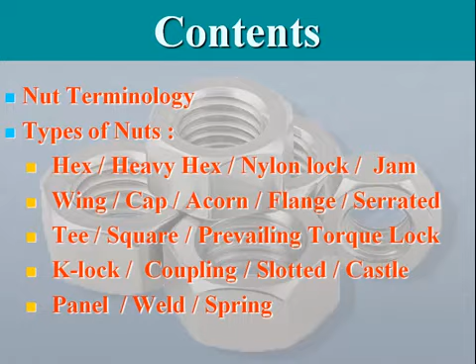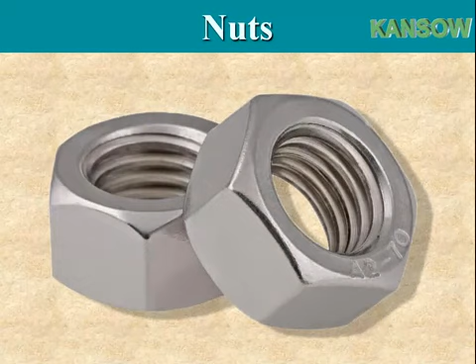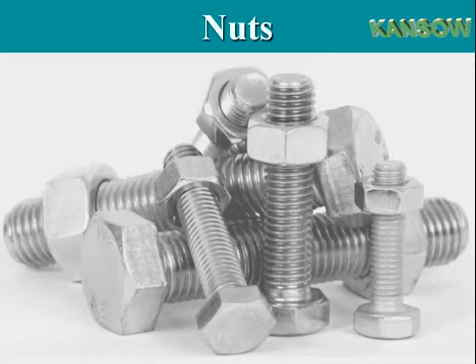A nut is a type of fastener with a threaded hole. Nuts are almost always used opposite a mating bolt to fasten a stack of parts together. The two partners are kept together by a combination of their threads' friction, a slight stretch of the bolt, and compression of the parts.

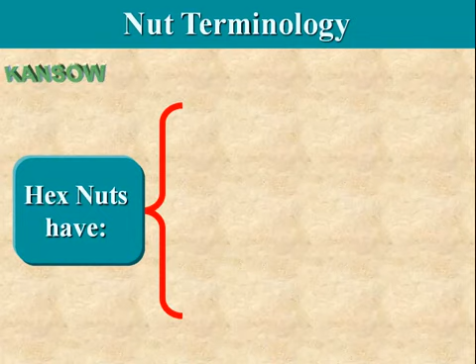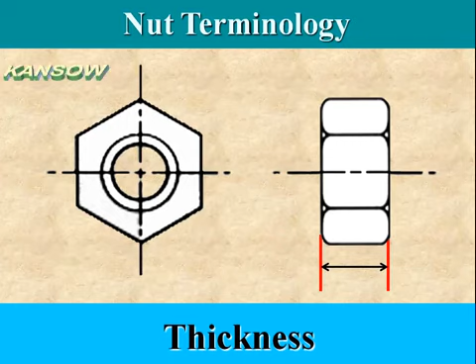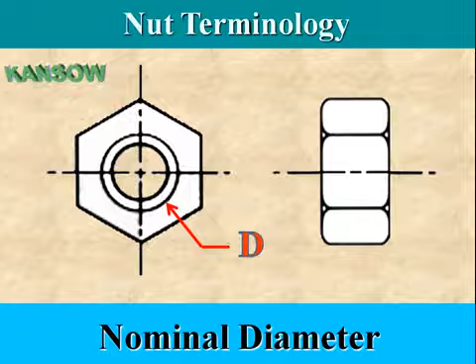Nuts have three important dimensions: thickness, distance across the flats, and inside diameter. Vehicles contain many different styles and types of nuts.

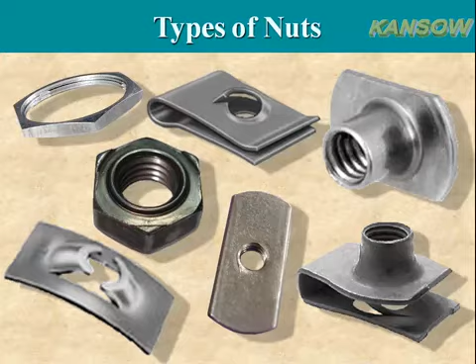Hex nut is the most common type, with a standard six-sided shape. Six sides give a good granularity of angles for a tool to approach from, good in tight spots.

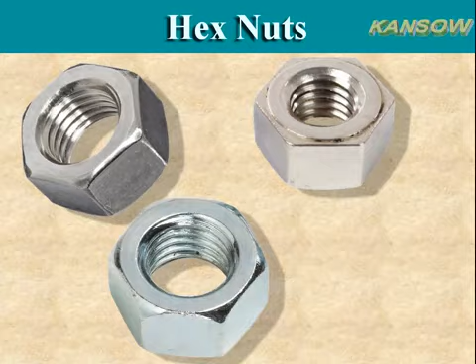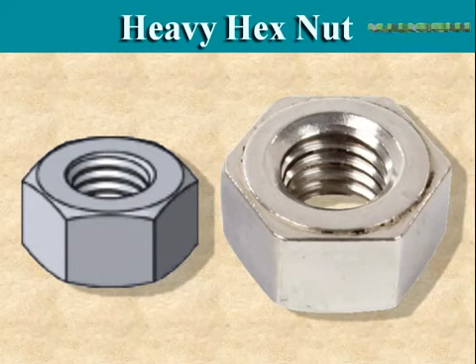Heavy hex nuts are slightly larger and thicker than standard hex nuts. There are numerous grades, and the heavy pattern is typically used for large diameter and high strength bolts.

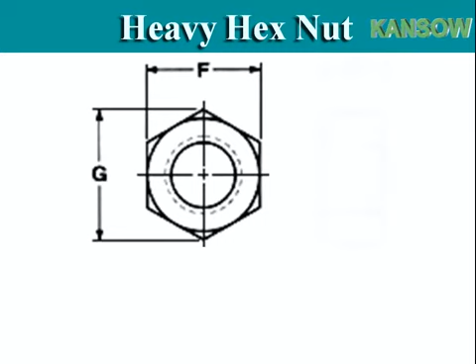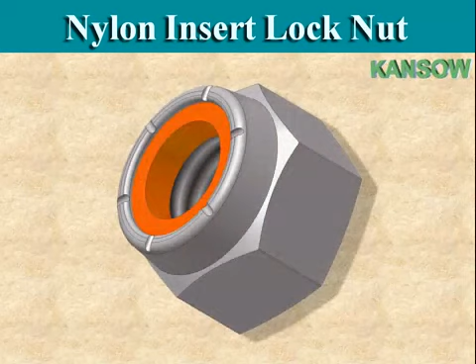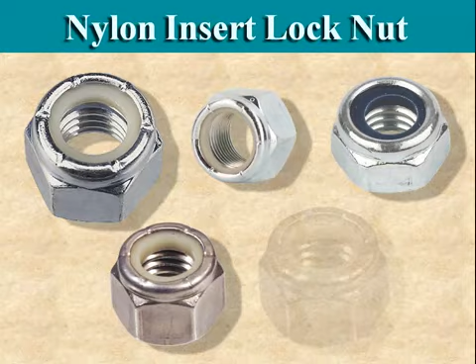Nylon insert lock nut is a nut with a nylon insert to prevent backing off. It's used for safety reasons when a nut should not come loose due to vibrations. Lock nuts are often found on front-wheel drive axles or exercise equipment.

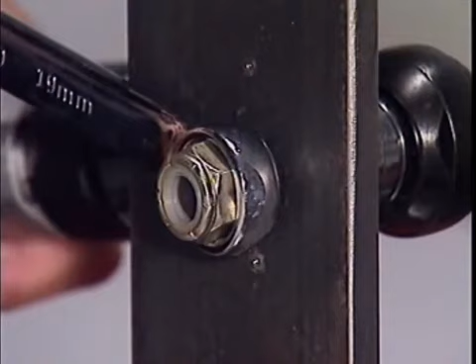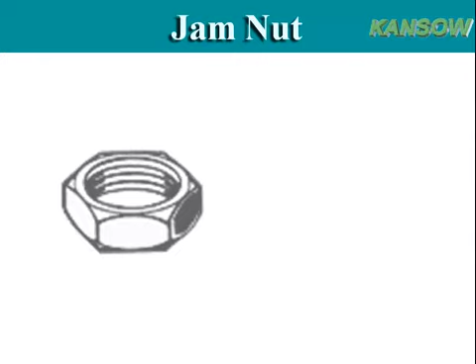Jam nuts are very thin hex nuts used in applications where height space is minimal, used to lock a threaded part in place.

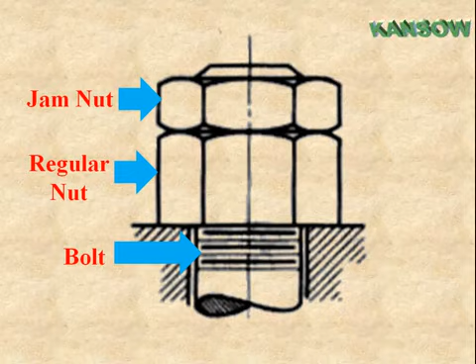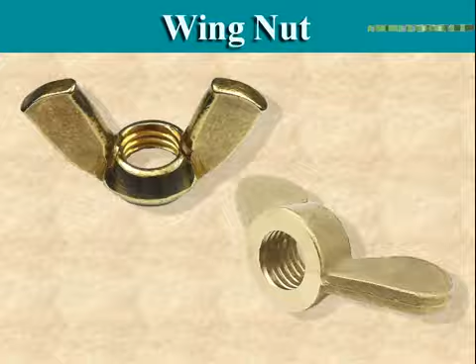A wing nut is a type of nut with two large metal wings, one on each side, so it can be easily tightened and loosened by fingers without tools. The shape of the wings varies greatly in terms of height and width. Wing nuts normally have a rounded base and are typically stamped or forged.

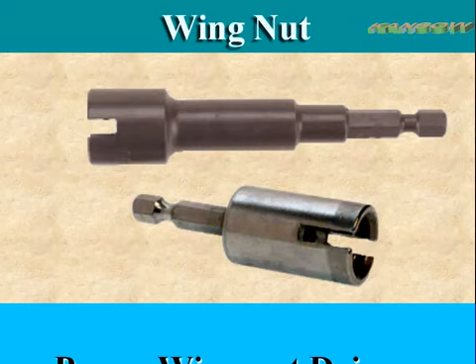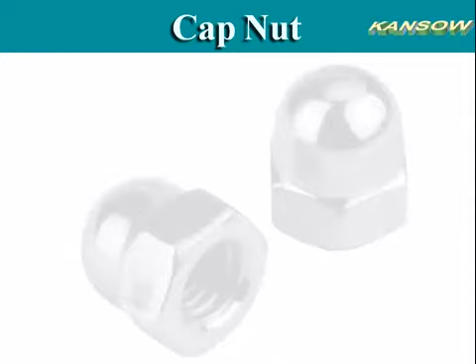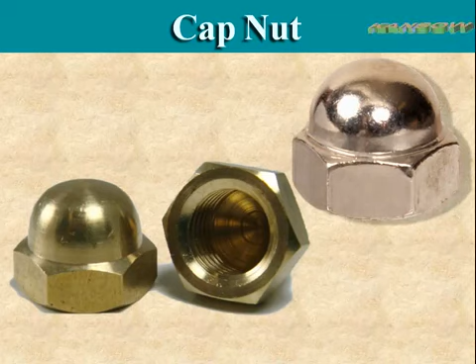Cap nuts typically appear to be a hex nut with one end dome-shaped. Such nuts can have closed or open crowns. Some are assembled from two parts, and are often used as an aesthetically pleasing finishing nut.

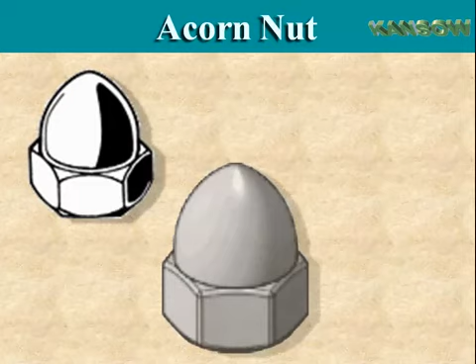Acorn nuts typically appear to be a hex nut with one end crown-shaped. Acorn nut is used to give a finished appearance by covering the end of the thread. Crowns come in three sizes: normal, high, or low crown.

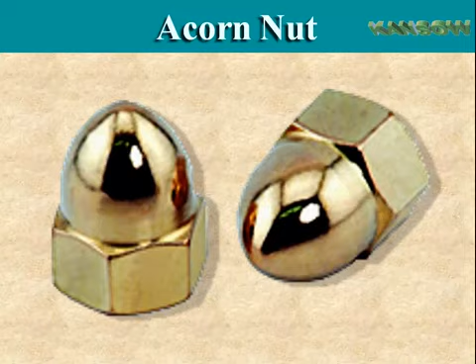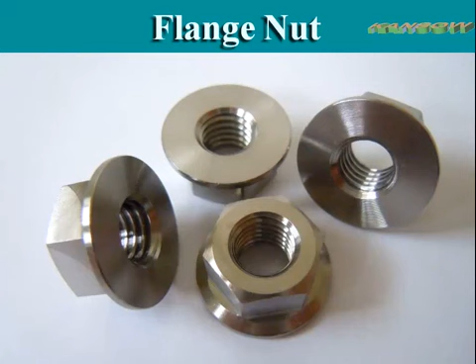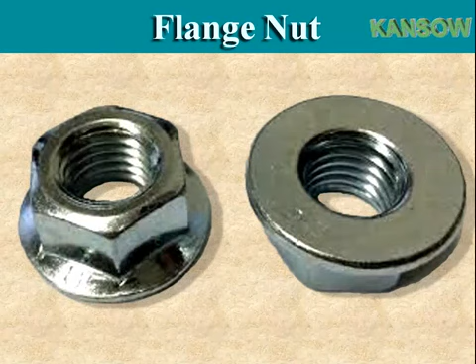Flange nuts integrate a flange to one side of a hex nut. The flange is typically more robust than an attached washer, providing far greater strength. Flanges can be smooth, serrated, or reverse serrated on their underside as required.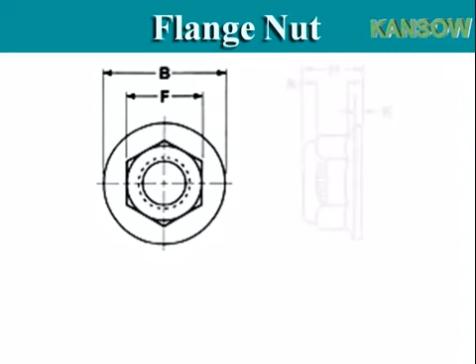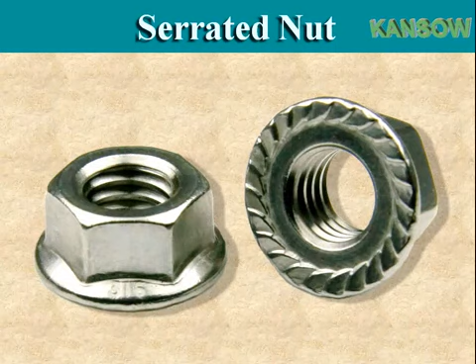A serrated face nut is a lock nut with ridges on the face of the nut that bite into the surface it is tightened against. The serrations are angled such that they keep the nut from rotating in the direction that would loosen it. Due to the serrations, they cannot be used with a washer or on surfaces that cannot be scratched.

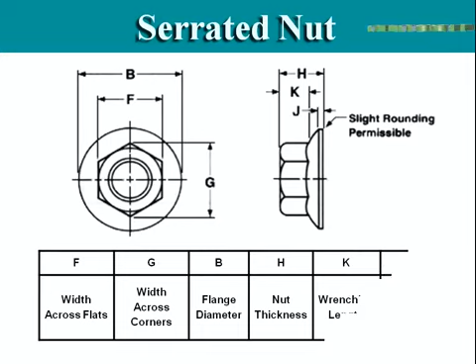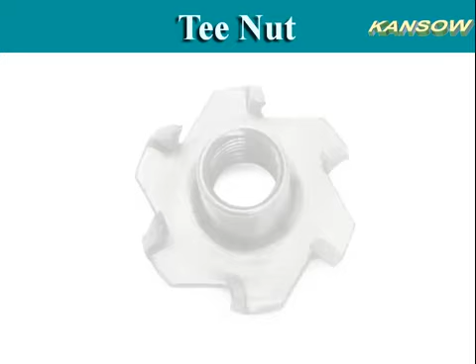T-nuts have an internally threaded central barrel and a flat base, with or without prongs. T-nuts come with a variety of features including straight barrels, tapered barrels, 3 prongs, 4 prongs, 5 prongs, all in varying sizes.

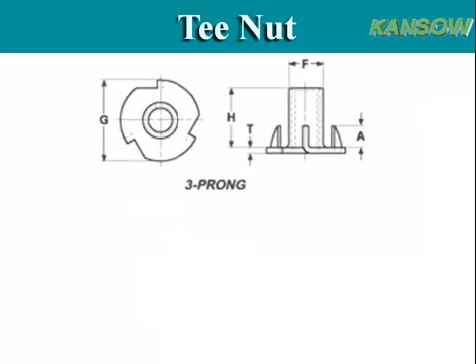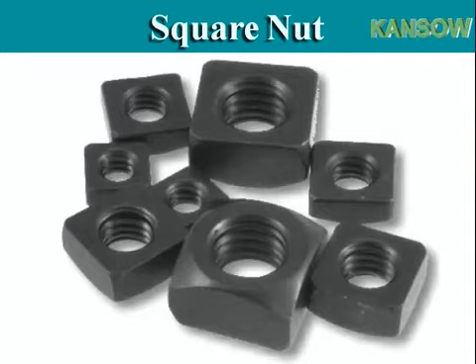A square nut is a four-sided nut. Compared to standard hex nuts, square nuts have a greater surface in contact with the part being fastened, and therefore provide greater resistance to loosening, though also greater resistance to tightening.

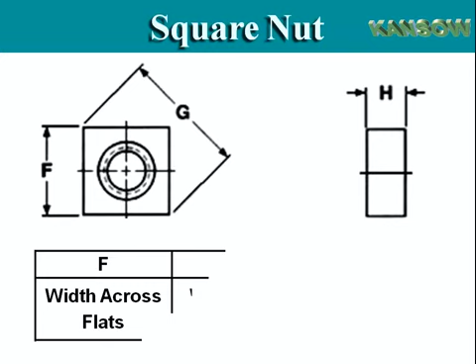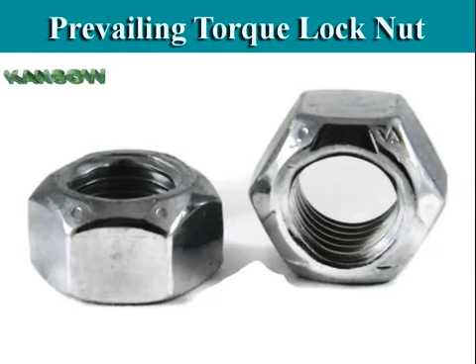Prevailing torque hex lock nuts have a conical top with chamfered corners. The resistance to loosening forces is created by a controlled distortion in the top threads from their normal helical form to a more elliptical shape. Lock nuts are designed to resist self-loosening under vibratory forces.

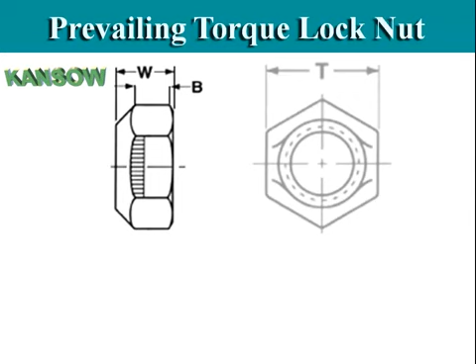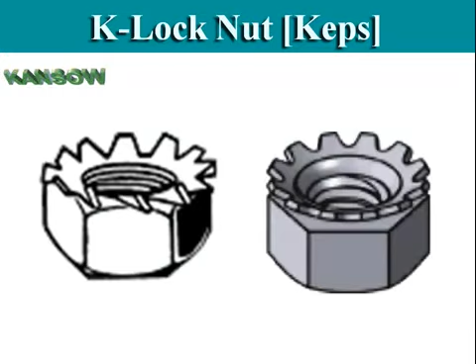K-lock nut is a nut with an attached free-spinning external tooth lock washer. It is also called a Keps nut or washer nut, and is used to make assembly more convenient.

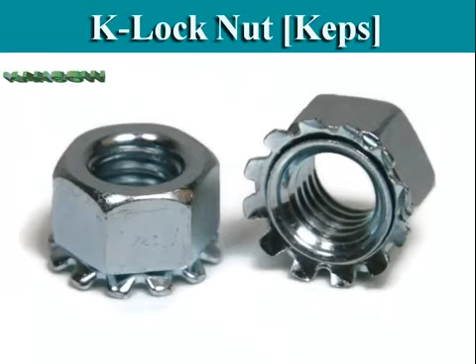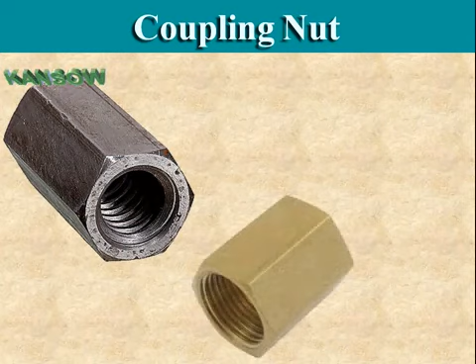Coupling nuts are long nuts used to connect two male threads. They join threaded rods, pipes, and other threaded parts, sometimes parts of differing sizes. A coupling nut is also known as an extension nut.

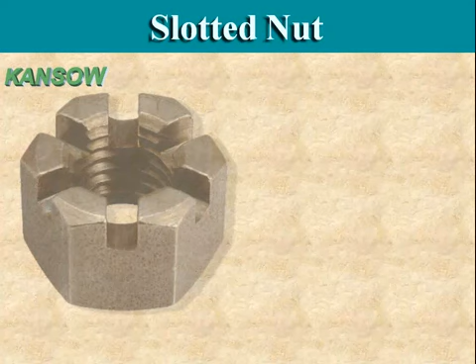Slotted nut is used in conjunction with a cotter pin on objects that turn or twist, for example on a tie rod or ball joint.

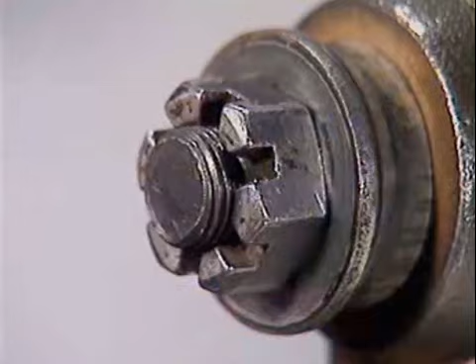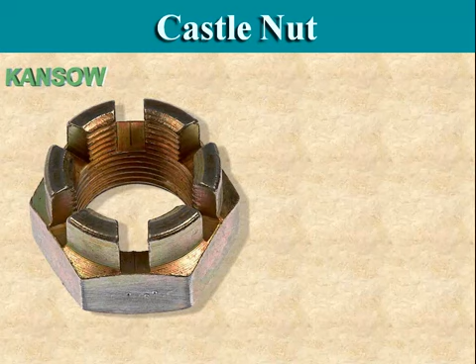Castle nuts are used in conjunction with a cotter pin on drilled shank fasteners to prevent loosening.

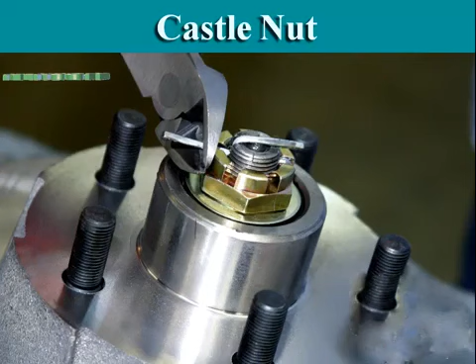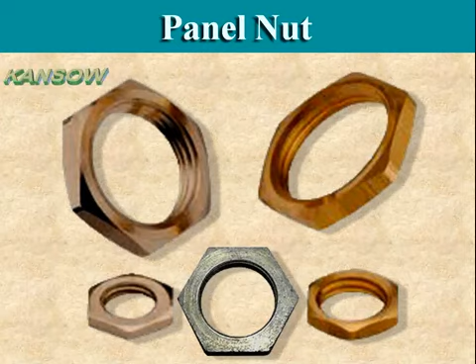A panel nut is a very thin nut with a relatively large hole, commonly used to mount threaded electrical switches. These are often used where light-duty precision fasteners are needed. And panel nuts are of two types: hexagonal panel nut and knurled round panel nut.

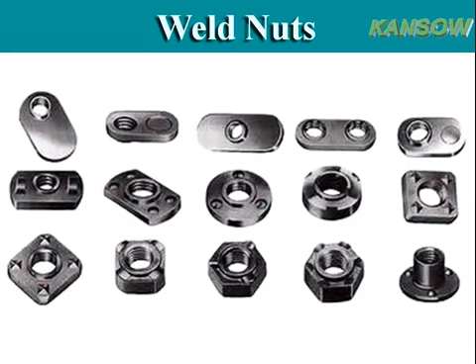A weld nut is a special type of nut specifically designed to be welded to another metal piece. There are various types for different applications.

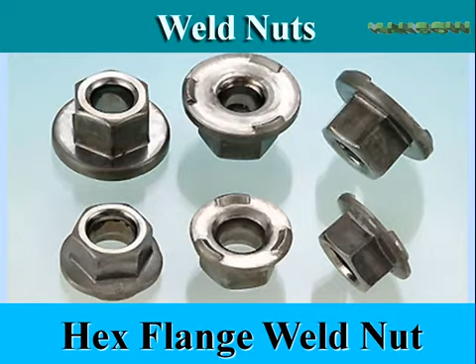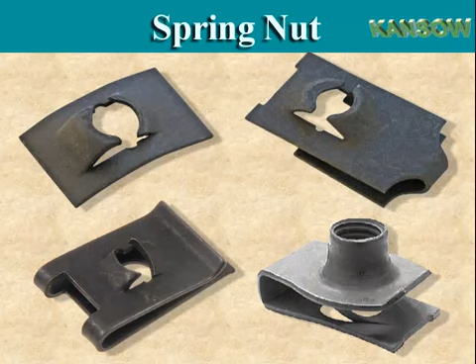Spring nuts are also called speed nuts because they save time in the assembly process. Spring nuts are one-piece, self-locking nuts that prevent screws from loosening during vibration. Speed nut is used in fastening sheet metal or other parts not requiring the strength of a regular nut. Spring nuts are available in flat, J, U, and rectangular styles.

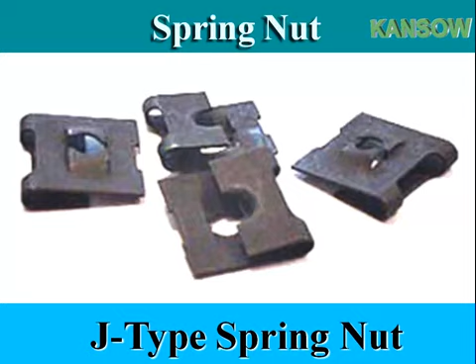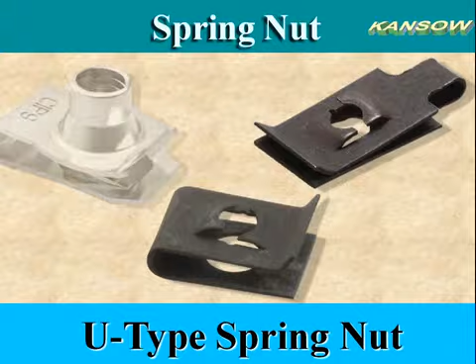A speed nut isn't as strong as the others, but it can be a fast and convenient way to secure a screw. Once the speed nut is started, it doesn't need to be held.